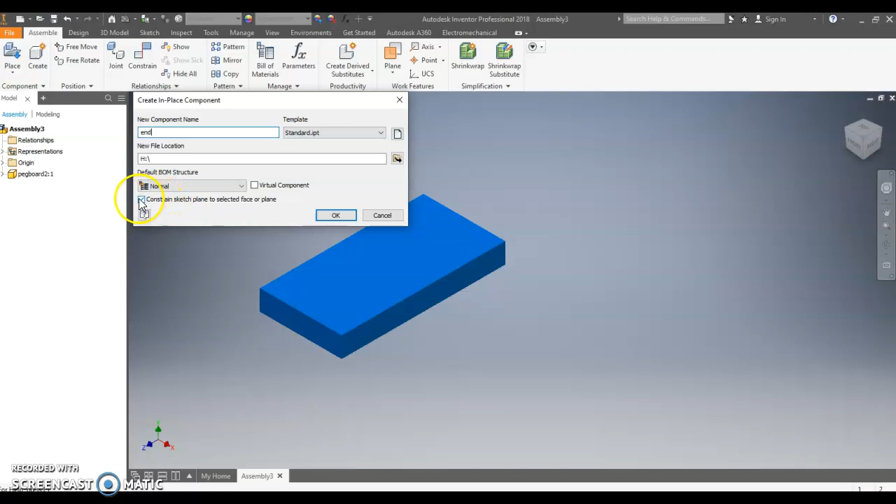Next, go up here to create. We're going to type 'end' in the component name. Make sure this box is checked right here, and then click OK.

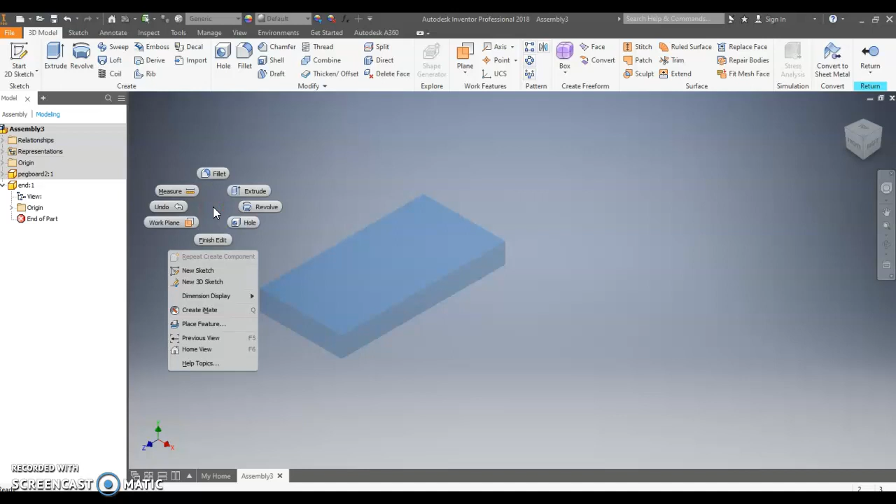Now we're going to click the front face of the pegboard here. I'm just going to move my cursor anywhere on the screen and right click, then go to New Sketch. Then I'm going to click the front face of the pegboard again.

Now I'm going to click Project Geometry, and click the front face of your pegboard again. Now what often confuses people is this yellow box on the left is not the edge of your board - that is a sketch plane. The board is this inside smaller yellow rectangle. That always confuses kids.

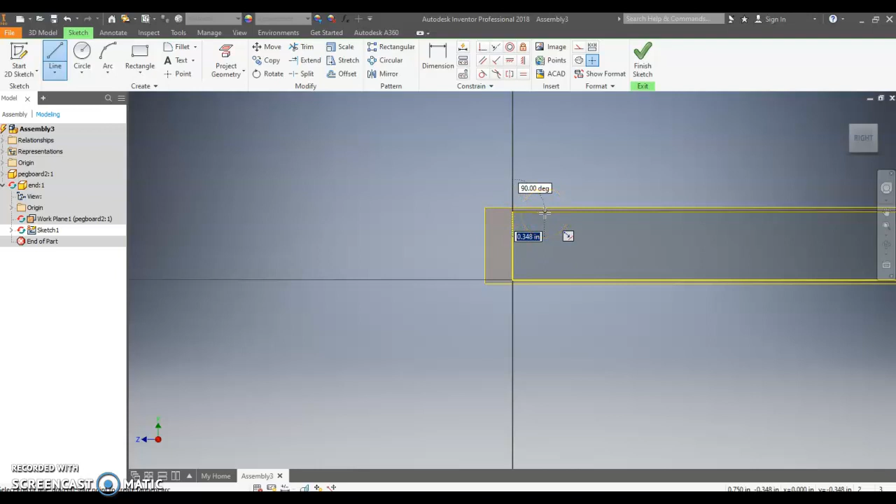Now I'm going to use the line tool to draw my end. Whenever you get to a corner, that green dot appears. I'm going to go to the green dot, then start moving to the right, and I want this to be 0.375. Enter. Now I'm just going to move my cursor up, and you want to make sure it stays at 90 degrees - if it gets off, you don't want to go crooked like this, you want it straight at 90 degrees. Then we're going to type in 2 for this height and push enter.

Now I'm going to zoom out a little bit. Didn't want to zoom out, oh there we go. Okay, now I'm going to come over - I want this thickness to be 0.75 and type enter. Now this length down here, we want to be 6.

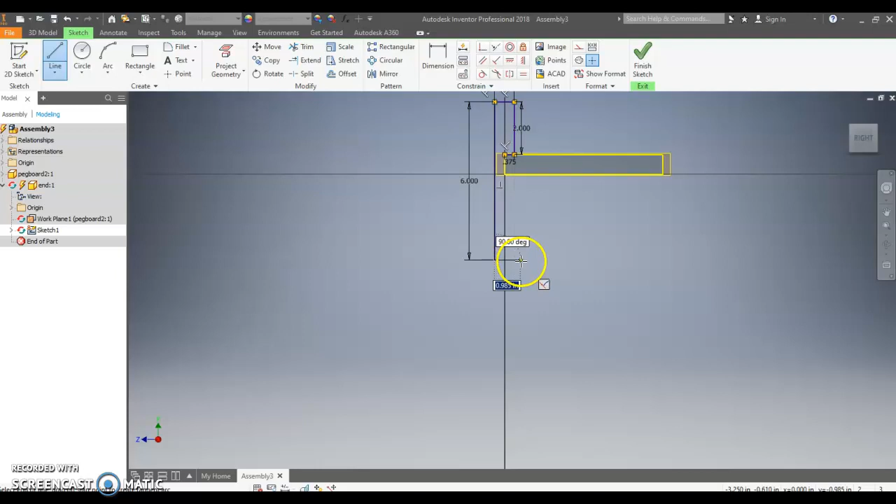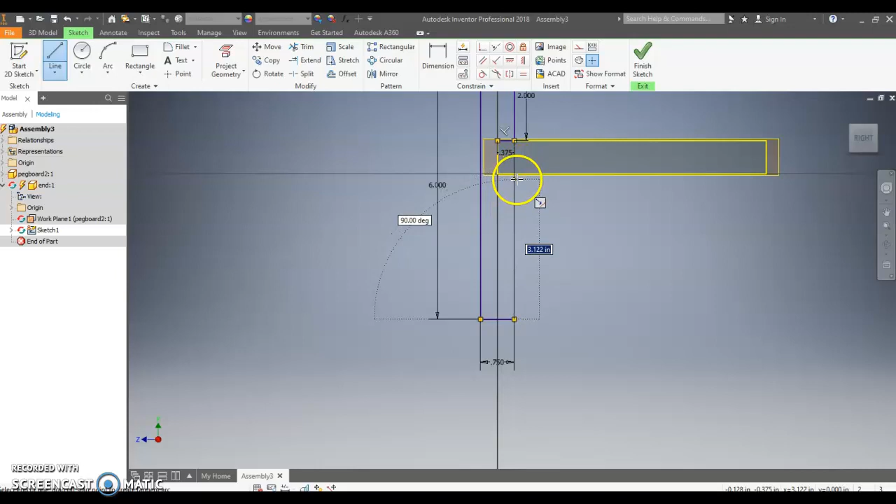Enter. Now we're going to come straight over here, 0.75. Enter. Come straight up to the board, and you'll see this little X appear, or maybe a green dot. I'm going to zoom in a little bit. And I came over just a little bit - I want to make sure I'm at 90 degrees, and so it comes out to 3.25.

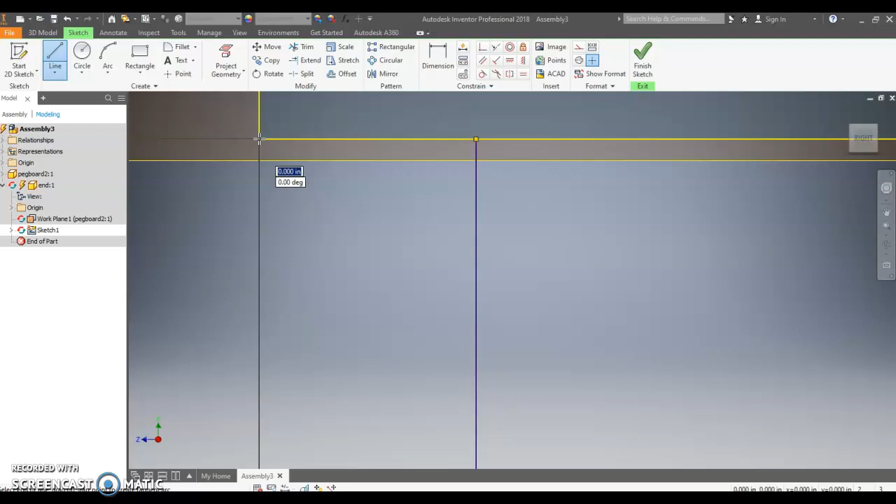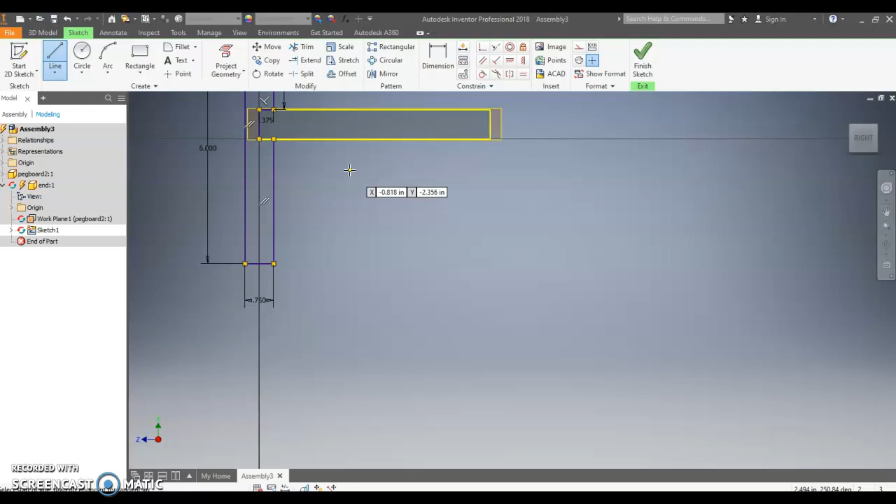I'm going to click that board right there, come straight across and find the green dot that appears on this corner and click that. Then I'll have to zoom out again, come up here and click this green dot. Okay, next, click Finish Sketch, and it will show your end here.

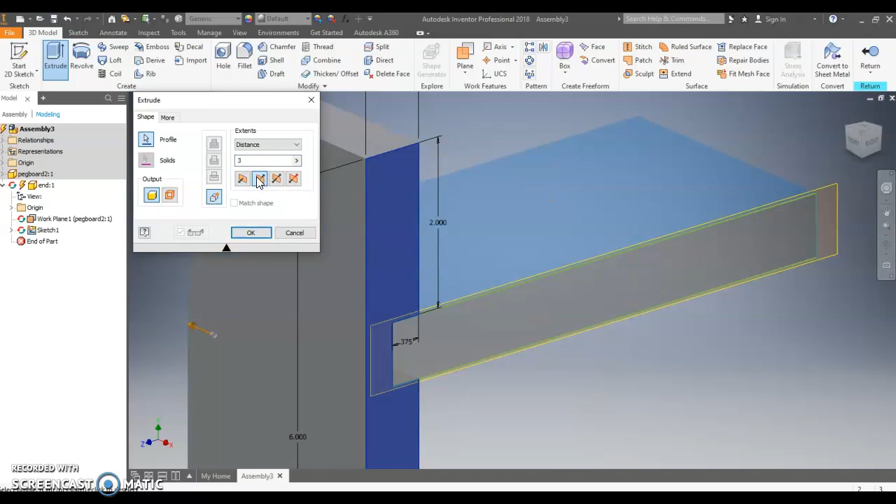Now I'm going to extrude it. If you've done it correctly, when you click the end here and type in 3 for the distance, you might have to click this little box to make it go back instead of forward, then click OK, and now you have your end piece right there.

Now we can click Return, and your end is on your board. If you don't want to see the sketch plane, which is that yellow rectangle, come over to the left side, find where it says Work Plane, right click it, then click Visibility, and it will check that off.

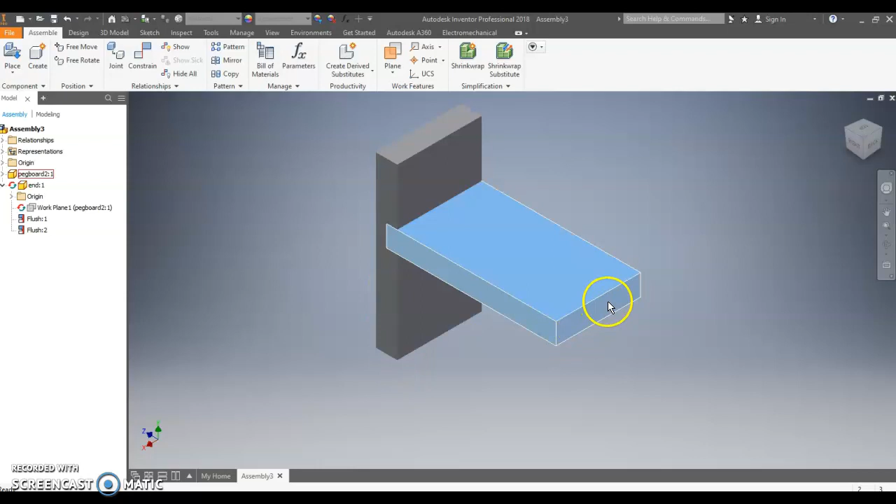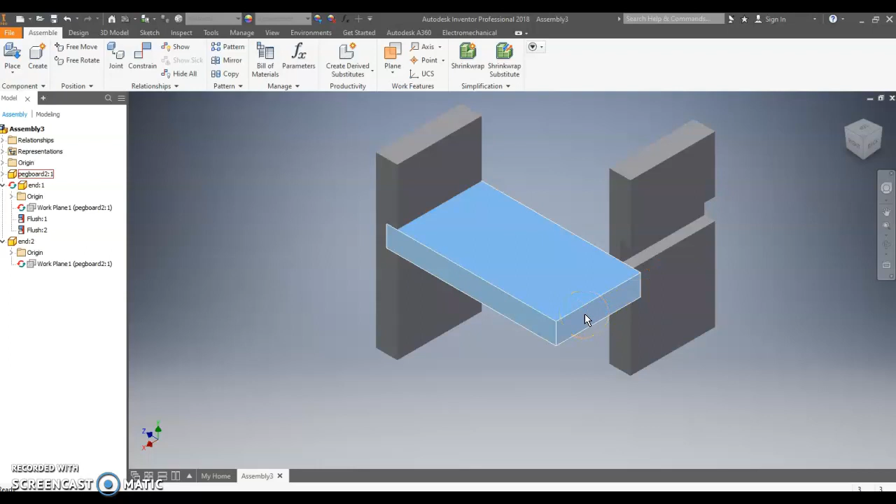Now to make the other side, you can follow the same procedure and just draw it on the other side if you want. Or another way is to right click this, copy, come over and right click, paste, and again I don't want to see that work plane, so I'll expand this, right click the work plane, uncheck the visibility, and now you can use constrain to put that end on here. Or if you follow the same procedure as before, you won't have to constrain it. So it's totally your choice as to which way you want to do it, but that's how you make your end. Then you'll want to make sure that you save your assembly.

I haven't named mine yet, so I'm going to go here to Save As. Make sure it's in your H drive. I'm going to call this my pegboard final - even though it's not done yet, I know that's where I'm going to find my final copy of it when I'm all done. Save it.

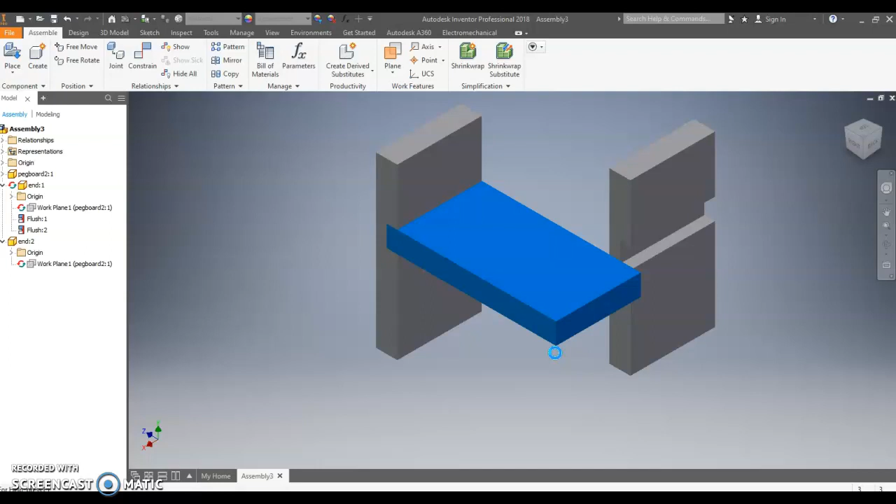And there you go. So now you'll have to put this end on your board, or go through the same procedure and draw out your end, but that's how you make the end with the groove.